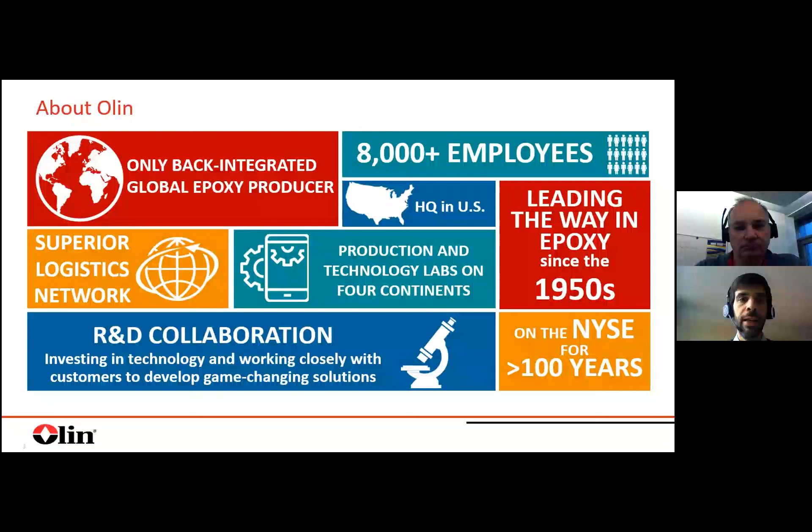Now, while I don't want to bore you with the full history of the company, let me just mention 3 milestones that I think are relevant for our discussion today. So, as I said, 1892 is the year the company was founded. Actually 2 companies were founded in 1892: Olin Industries, a manufacturer of ammunition, and Mathieson Chemical Corporation, the first company to make chlorine in the US out of the chlor-alkali process. So chlorine is really in the soul of this company since many, many years.

Then I skip some milestones. In the 50s, these 2 companies merged together, originating a group active in chemistry and ammunition. And Olin is still today that kind of company.

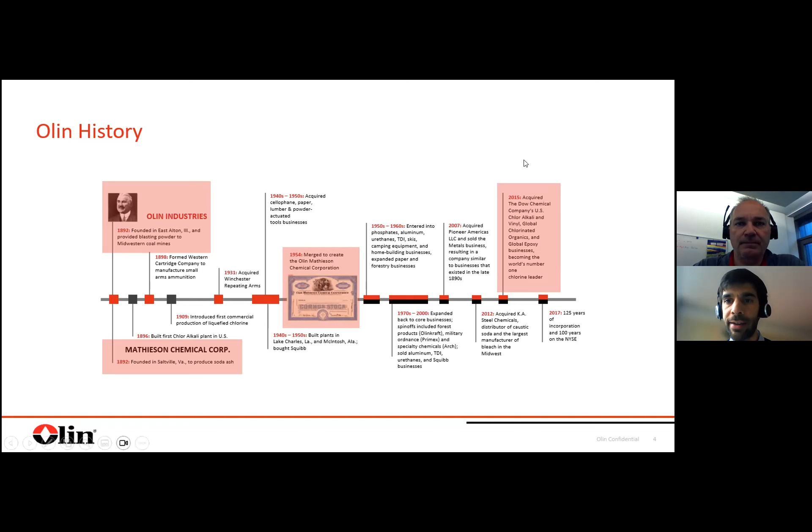And then I'm skipping to 2015, a very significant milestone for our discussion today. Olin acquired from the Dow Chemical Company the global epoxy business, the US chlor-alkali business, and the global chlorinated organics business. A transformative acquisition for Olin that, as we can see in the next slide, transformed Olin into the #1 global chlor-alkali producer, and importantly for our talk today, the #1 global supplier of epoxy materials, inheriting this position from the Dow Chemical Company and bringing it to the next level.

So today, Olin is divided into 3 businesses: Olin Chlor-Alkali Products and Vinyls, Olin Epoxy, the business Lars and I are part of, and Winchester, which is our ammunition business. So let's now focus on Olin Epoxy. What is Olin Epoxy doing? Well, in 10 seconds, we are leveraging epoxy properties like corrosion protection, lightweight strength, electrical insulation, and chemical resistance to approach those markets where these properties are valuable, like coatings, electronics, civil engineering, and importantly for our talk, composites.

Now, if you want to remember one thing about Olin Epoxy, I would really try to remember our model, right? Our deeply back-integrated model. But before going into that, I don't know how familiar each of you is with epoxy, but from a very high level, you could say to make epoxy you need 2 things: epichlorohydrin and bisphenol A. Now, most epoxy producers run a non-back-integrated model like the one you see here on this slide. So they source epichlorohydrin somewhere, bisphenol A somewhere else, and they make their epoxy resins.

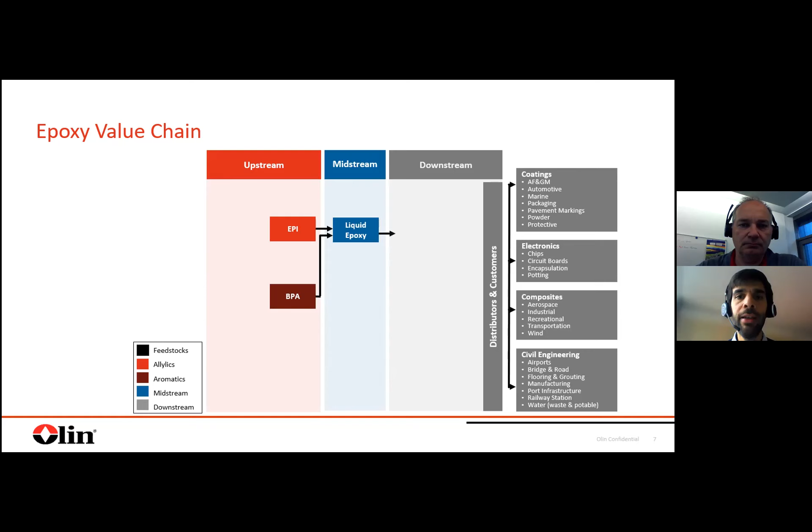Now, Olin's model is completely different, as we can see in the slide here. Olin is deeply back-integrated on those molecules that we think are strategic for our reliability of supply, for our scalability, for our sustainability. Look, for example, at epichlorohydrin.

We start from digging our own salt mines. We make with that salt chlorine out of electrolysis. From there, we make allyl chloride, we make our epichlorohydrin, and then our liquid epoxy resins, right? So a deeply back-integrated model that gives us the reliability of supply, scalability, and sustainability that we need to make our products.

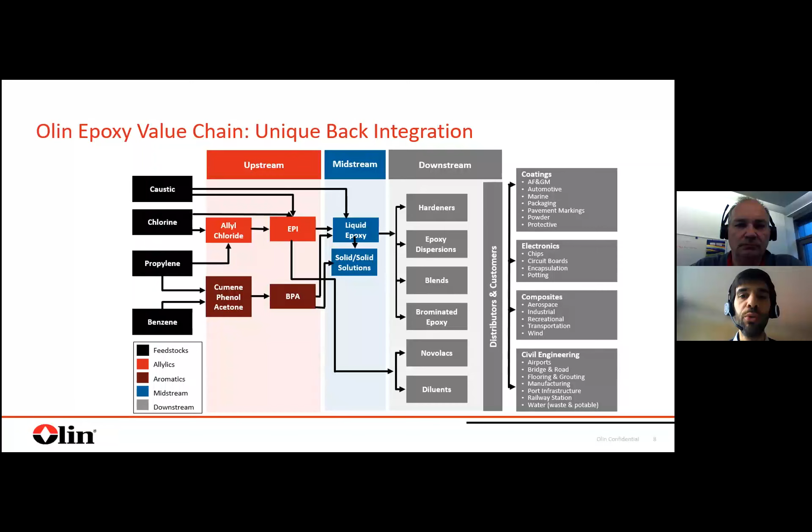This model is applied to a very wide portfolio of epoxy products. Some of these products are part of our composites portfolio, and that's where we come to our topic. In our composites portfolio, we have systems for pultrusion, filament winding, infusion, hand layup, HPRTM, and pre-preg. I think the composite portfolio is one where our deep back integration is very valuable.

If you look at these applications and technologies, they are linked to high growth applications. Pultrusion, as we will discuss today, goes into composite rebars but also wind energy applications. Filament winding goes into hydrogen mobility. HPRTM goes into e-mobility - high growth applications where we think our back integrated model is valuable to offer the supply reliability and scalability that these applications will need.

Now, in composites, what we see is that it's really not enough to sell a product. Process knowledge, process understanding is what we need to share with our customers to actually make them successful. And this is a bit what we're going to do today.

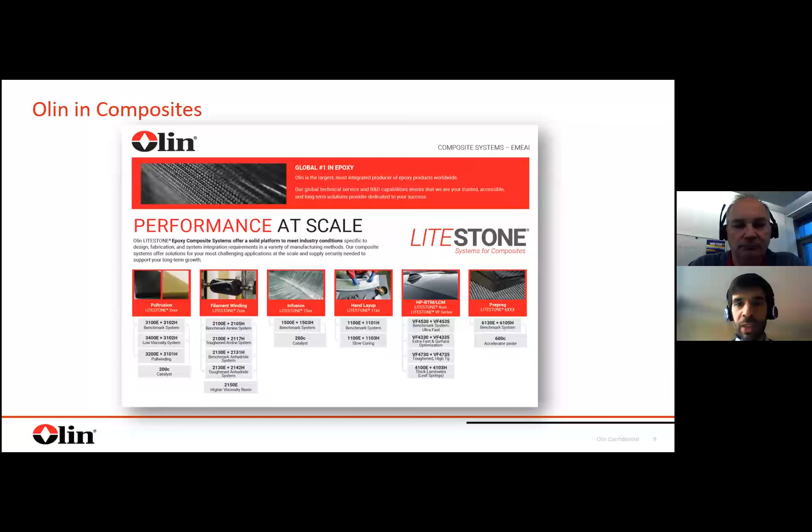So in the next slide, we are introducing the topic of today. We will speak about pultrusion and pullwinding processes, with focus clearly on pullwinding, explaining the specifics about pullwinding and why we think pullwinding is definitely not pultrusion. We will use as reference application for our review today composite rebar, which is made in pullwinding.

And we will demonstrate that, to make a quality composite rebar at high productivity, it's really not enough to just pick a standard pultrusion system. We need something specific, and we will talk about our LITESTONE epoxy systems for pullwinding of composite rebars.

But before going straight into the process review, let me answer one question: why epoxy? Why is Olin, the leading epoxy producer globally, talking today about rebars and pultrusion? Well, we think epoxy in rebar pullwinding has three main pillars in its value proposition: mechanical performance, high chemical resistance, and EH&S profile. Under the mechanical performance point of view, among the available composite matrices, epoxy is at the top end of mechanical performance.

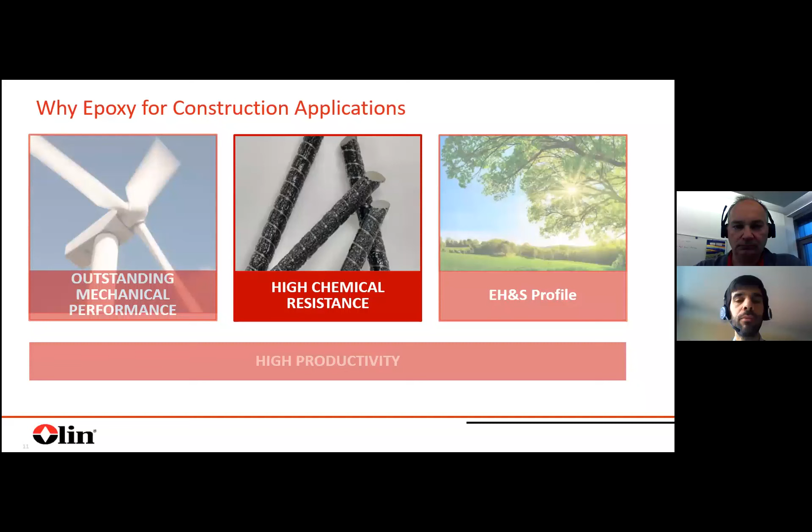But that's not all, because epoxy not only enables us to meet those specs, but it also enables us to retain those specs when the rebar is subject to attack from specific chemical agents. And that's what we are showing in the next two slides. I will not go into the details, but what we are showing is that we are not only matching the requirements of the specs, but we are also retaining those specs when the rebars are subject to the specific tests of these norms, like alkaline resistance tests and so on.

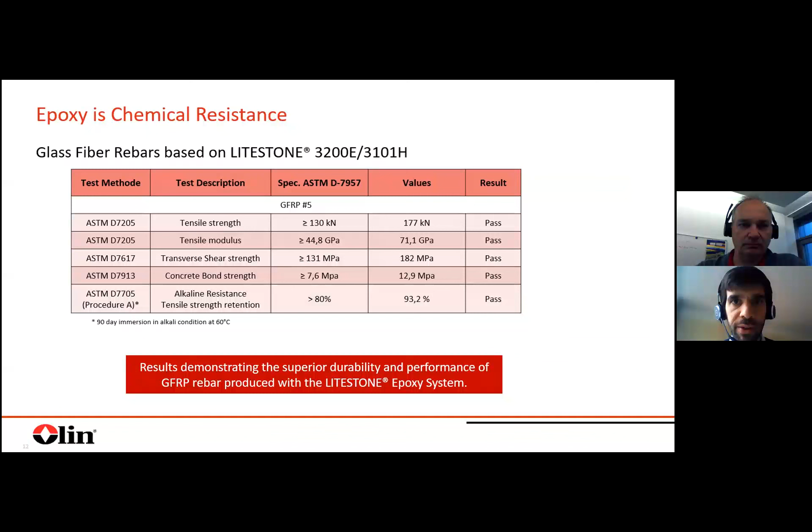And this does not only happen for glass fiber rebars, but it happens also with basalt fiber rebars. So chemical resistance is definitely an important pillar of the epoxy proposition in rebars.

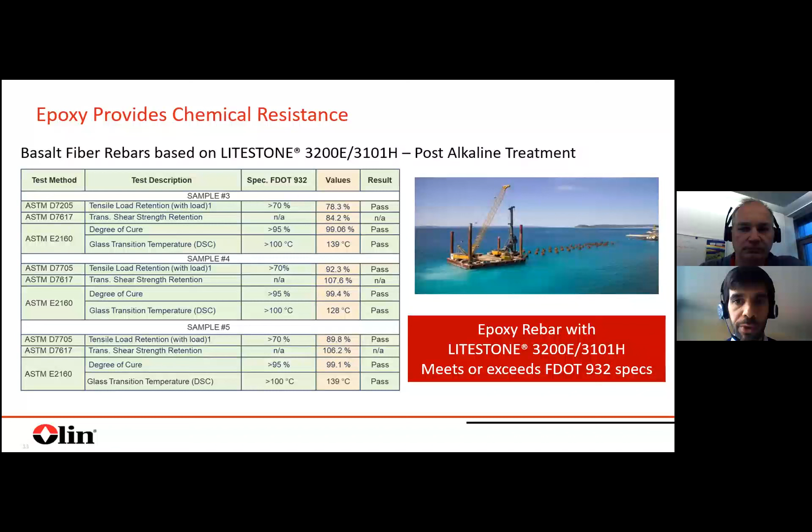And then last but not least, we come to sustainability. Epoxy is a fully solvent-free matrix, which means it's not flammable, which means it's friendly for the workers. And when it comes to installing or expanding production capacity, it means that this capacity increase happens at lower cost versus other matrices that use flammable solvents.

So with epoxy, you need simpler exhaust systems. You don't need an EX protected area. You don't need cold storage. So all that leads to a lower CapEx when installing or expanding capacity. So this was the answer to why epoxy for pullwinding rebar.

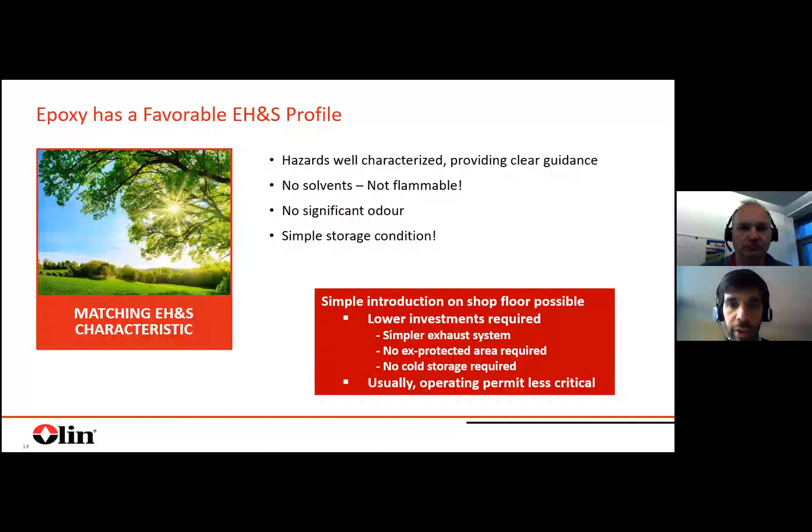And now it's really time to go deep into this process review, pultrusion versus pullwinding. And for that, let me turn it over to my colleague, Lars Friedrich.

Thanks, Martino. A short introduction also from my side - welcome. Lars Friedrich, T&D manager at Olin, based in Stade, and I'm the technical lead for all the high productivity processes like pultrusion, pullwinding, but also other topics as mentioned, HPRTM, LCM, and so on.

Really the essential part for us is to point out what are the differences between pultrusion and pullwinding, and what the effect on material selection really is. So first, I would start with the key message: what is really the main difference between pultrusion and pullwinding? At the end, it's really the cure scenario - how you cure your resin.

In pultrusion, where you have a well-defined shape, you have a closed mold where you gelate and cure the resin. This creates friction in the closed mold, which leads to higher pulling forces. There you have specific requirements on the resin, which is linked to this. I will come to this in a minute.

In pull winding, you have a completely different scenario. You just impregnate it, form it, and then you have a wet profile which is consolidated by winding, and then you pull it through a post-curing oven. So it's a freestanding cure, not in contact with any die doing the cure. So all the challenges related to pultrusion are not given.

That means that for these two processes, the requirements on the resins are really different. You can use both of them in the other process, but it will have a negative impact on productivity, quality, or whatever.

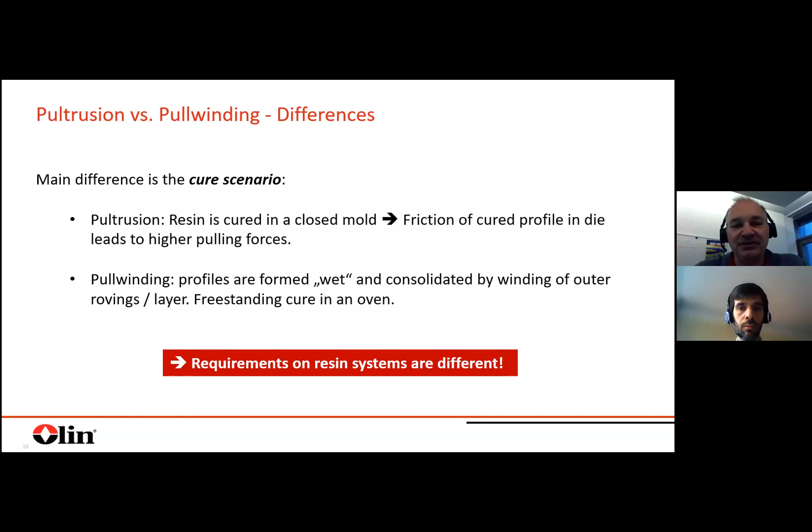Just as a scenario, I will not go too deep because I think pultrusion is well known. You pull your fiber through an impregnation unit, often a bath. You have a heated die where you cure it, and then you can wind it or cut the parts.

In pull winding, you have the same up to the impregnation bath. Then you have a kind of preforming unit where you just form your profile. Afterwards, you have a winding station to consolidate this profile, and you have a post-curing oven. So really, as described before, the cure scenarios are quite different.

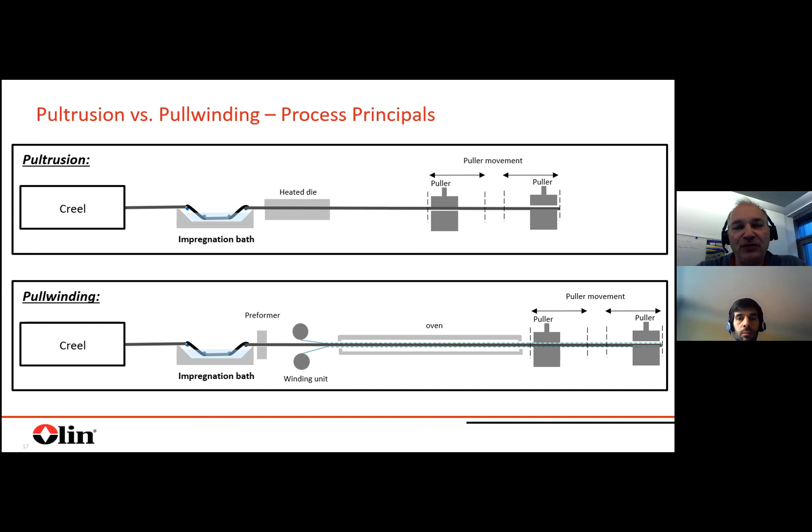So what does it mean for the resins themselves? If you compare pultrusion and pull winding on processability, for pultrusion I would say it's a more sensitive process, because you really have to find a good balance between processability, line speed, surface quality, and so on.

As you cure it in the die, you need a really accurate method to manage the pulling forces, which is also related to part quality or surface quality. In pull winding, as you have this freestanding cure, these issues related to the closed die don't exist. That means that from a processability point of view, pull winding is much more robust. It has a bigger process window, and it's not so sensitive to distortion and so on.

Internal release agent: in pultrusion, it's required. Otherwise, you will have a significant issue with your pulling forces and/or the surface quality. In pull winding, as you don't have a closed mold, it's not required.

The key requirement on process control for pultrusion, as mentioned, is that you have to find a good spot between positioning of the gelation point in the die to minimize the pulling forces and optimize the surface quality. On the other hand, you will also optimize your output, so at the end your line speed. So there you need a really well-defined way to do this.

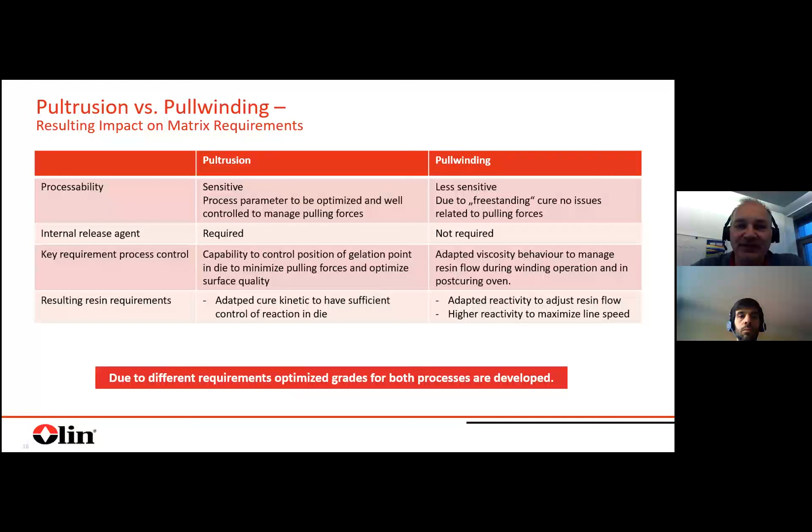But what I would like to do first is really go through the pull winding process and define the critical process steps from a resin point of view—what are really the steps in the process that limit line speed, what should be focused on to create a high quality rebar or profile. So the most important step is really the impregnation.

So key criteria here, for sure we have to ensure there is sufficient and good impregnation at targeted line speed. That means for high productive processes like rebar production, we're discussing 5, 10, maybe faster. So the requirements on impregnation are different compared to pultrusion, where we're discussing a range up to 1 meter per minute, maybe now going slightly higher, but it's a completely different range.

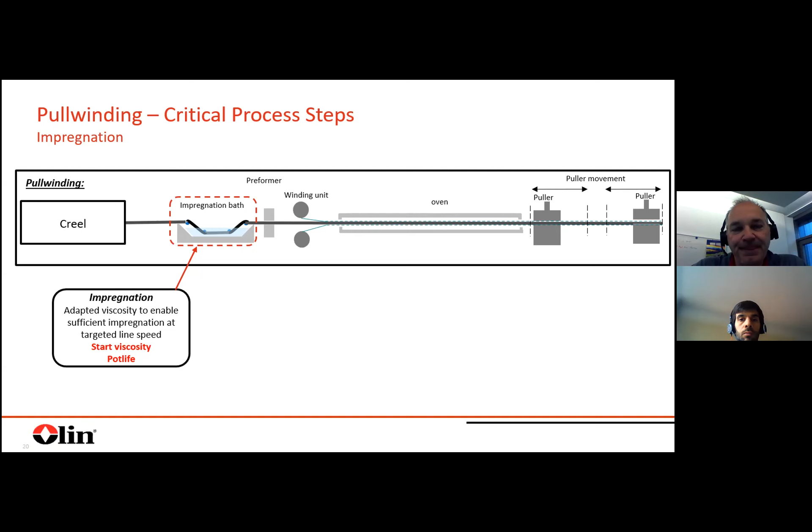Here the key criteria from a resin point of view is the start viscosity of the resin, and for sure the pot life if you're using an impregnation technology like an impregnation bath. What I'd also mention is that impregnation is also the limiting factor for the line speed of the production.

So mainly, I often say we need a high reactive system to run the line fast. It's not really a problem for us to create a high reactive resin system, so we can make it as fast as you want. The problem is really the processability.

In the typical setup of a Pullwinding line, it's an impregnation unit, a bath. That means you have pot life requirements, and this is really a limiting factor for the resin reactivity of epoxy systems. If you go to high line speeds, you need to make sure you have good impregnation, and there the resin is important—viscosity, wetting behavior, and so on.

But it's also about how you bring the resin to the fiber—simple baths, how your baths look. I will come to this in a minute. It's not only the resin which defines what kind of line speed can be achieved; it's really the combination with the impregnation.

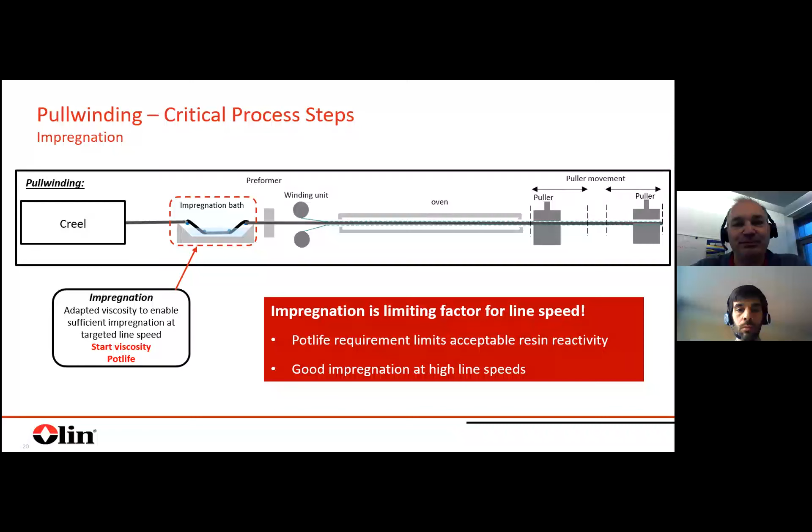This is something which can be optimized. We have a lot of ideas around this, I'll come to it later. But this should be kept in mind: when we discuss productivity, it's as usual the combination of material and process which has to be optimized. The key here for this process is really the impregnation unit.

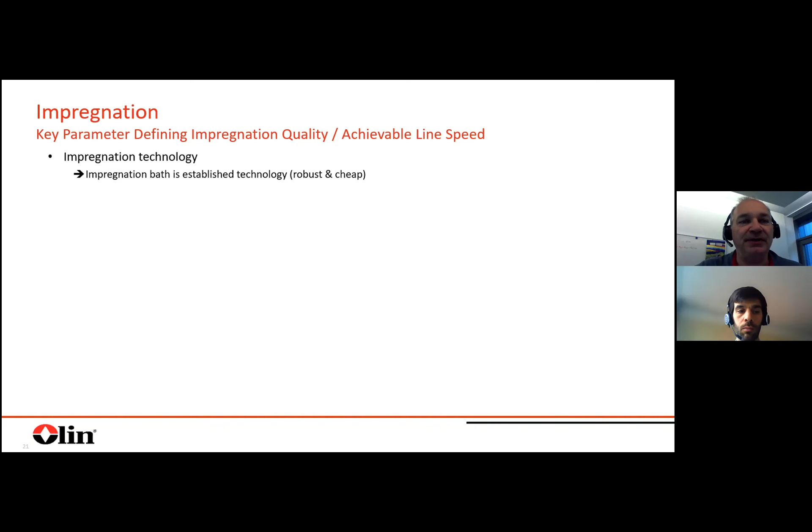So what are the critical parameters for impregnation? As mentioned, it's the impregnation technology itself—a simple bath, or for other processes, transfer rollers or whatever is used. It probably doesn't make sense for all applications, but the technology itself and the resulting limitations are really some of the critical parameters for impregnation.

Fiber type is also clear—if you try to impregnate a carbon fiber, it's a different story than glass, but also between different glass types. The sizing has a big impact, the quantity of the sizing directly impacts the impregnability, and this has to be considered when you design your process and your part.

For sure, the resin—no doubt. So the target for Pullwinding is viscosities below 1000 millipascal second at room temperature for bath impregnation.

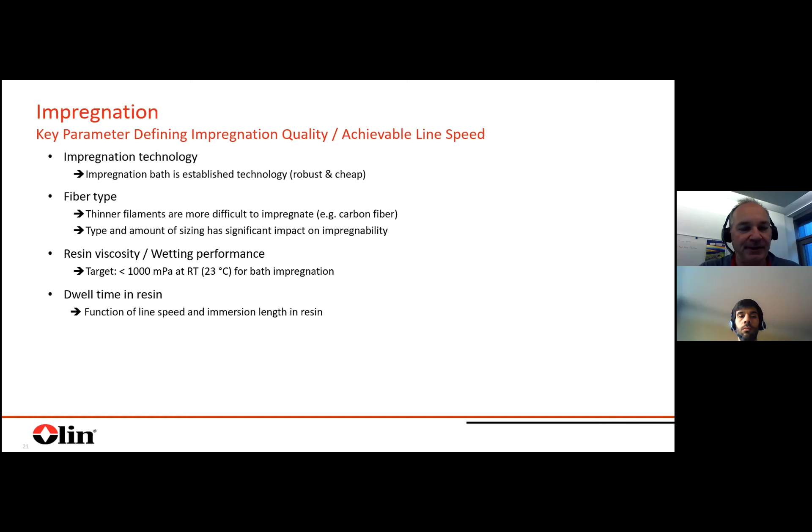The dwell time in the resin, which is a function of the line speed and the immersion length in the bath in this case—it's clear, if you have more time, then you have a better impregnation usually.

The fiber tension and guiding is often not considered. If you have, for example, high tension on the tow, it also closes the tow and makes impregnation more difficult. But also the fiber guiding of these tows has to be optimized so it has good access. If you bundle a few rovings and guide them through a bath, the inner rovings don't have access to the resin, so the wetting will be bad. A more homogeneous distribution could be helpful.

Spreading, for sure, is also important—to flatten it so there's better access. So everything related to fiber guiding and tensioning directly impacts impregnation capability.

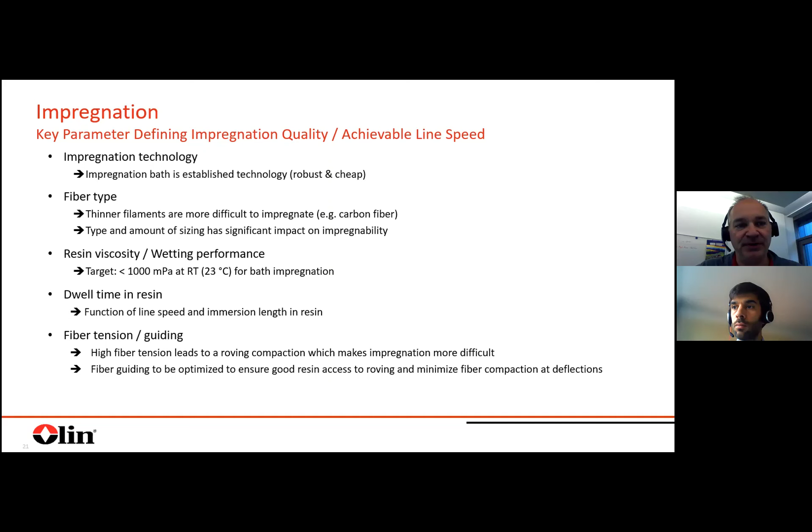Some recommendations in terms of optimization of the impregnation: for sure, as mentioned, it's really the design of the unit itself that has to be optimized. I think it depends on different parameters, how it can look, how sensitive your fiber is—some fibers break at every deflection, others are really robust. The pot life of the resin, is this an issue?

The viscosity, and for sure also pulling forces, which in Pullwinding is usually not a problem, but you can create pulling forces in the impregnation unit which, if too extreme, may lead to issues.

Fiber preheating is also recommended—first for softening, especially with glass, the sizing. It helps to open the glass rovings. Also, if the fiber is preheated, it doesn't freeze on a cold fiber. So when it goes into the fiber bundle, the wetting and impregnation is better. Otherwise, you have a local viscosity increase and you create a kind of micro porosity in these areas. So it's really helpful if the fiber is preheated.

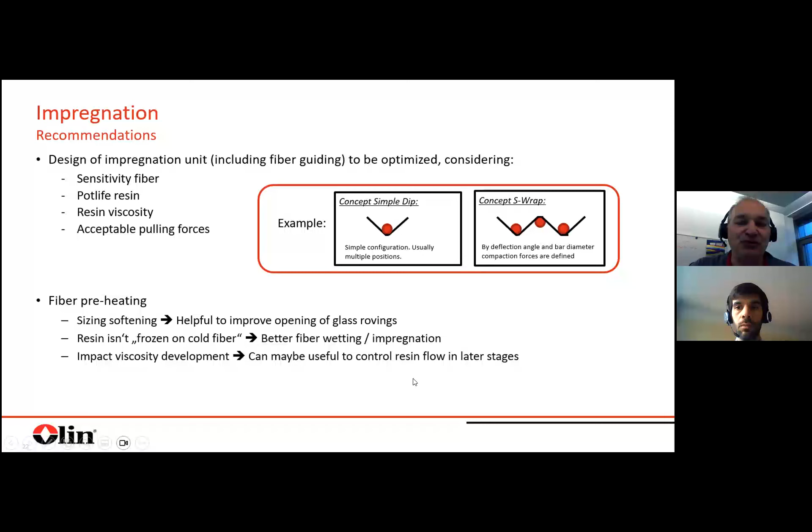If you have fiber preheating and then a bath behind, you also bring energy into your bath, which is usually not a problem, but if it's too extreme, it can have a significant impact on the pot life, depending on the setup and systems. This is something to consider, which for impregnation is normally manageable, and can also be helpful to control the resin flow in a later stage. I will come to this.

One other option would be to operate a heated impregnation bath. By this, you can reduce the resin viscosity, which simplifies the impregnation. You can also minimize the resin volumes in the bath or impregnation unit. This would really open the door to use more reactive resins, and then for sure you have also higher line speed potential.

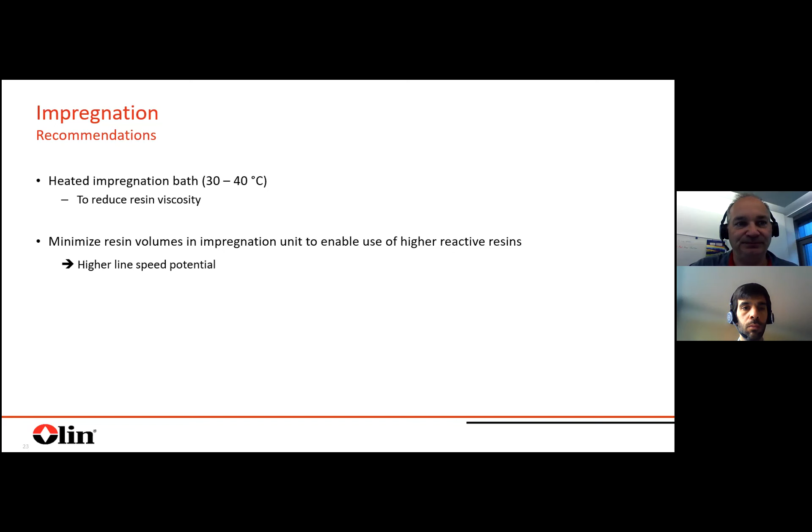As mentioned, key requirements from the impregnation point of view on the resin are a long pot life, which is a limitation for our reactivity, low start viscosity, and good wetting performance. So lower viscosity helps for sure. And it should be solvent free, from an EH&S point of view, to minimize emissions, as you often operate in an open bath.

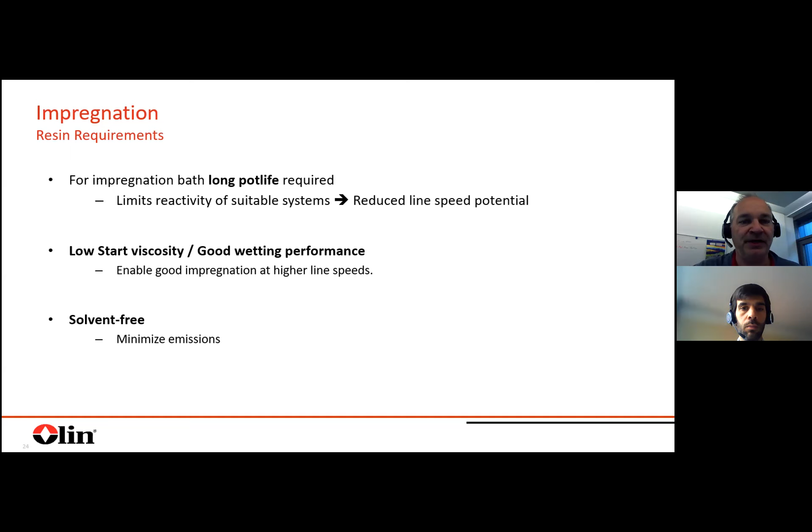So the next critical step would be really the winding unit and preforming. I think it's not the most critical step, but here often you need a kind of sufficient resin flow to impregnate the winded tows or plies. That means at this stage you need to understand and control the viscosity of the resin.

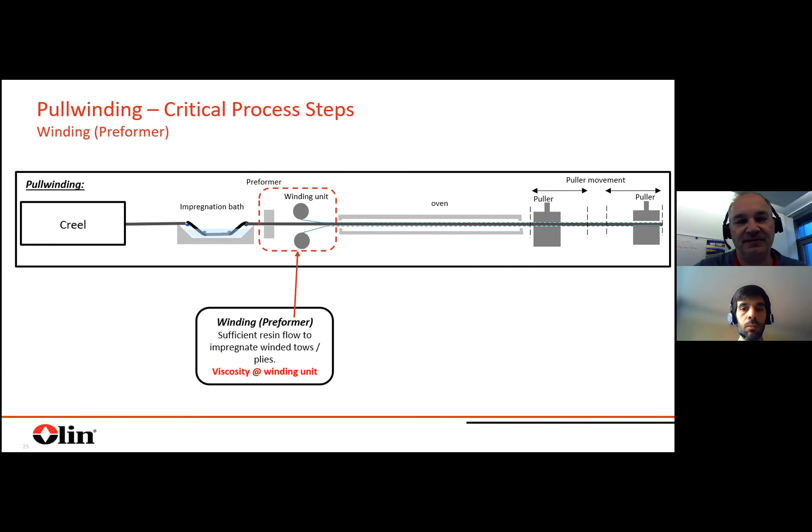The preforming unit's function is usually to bring the roving into the shape of the part, define the ratio between resin and fiber, and bring it to the winding station. So that means the design criteria for the preformer are the part design, and then you have to define what kind of excess resin is needed to impregnate later the winded tows or plies. But there's also a potential need to extend the functionality of the preformer.

If you have a bit more challenging fiber, which needs higher viscosity systems, you need to force the resin more into the fiber. That means you have to extend or integrate a kind of impregnation step - for example, just a few deflection bars on the way from the roving from the bath to the forming station, to further improve the impregnation in the tows. This really needs to be validated depending on fiber and resin.

And in this step, pulling forces are also created. You have to pull the fiber through something, and if you have these deflection bars, you have additional forces. So forces are created, but this can also not be negative - to some extent, pulling forces are also good to improve the performance of your profile.

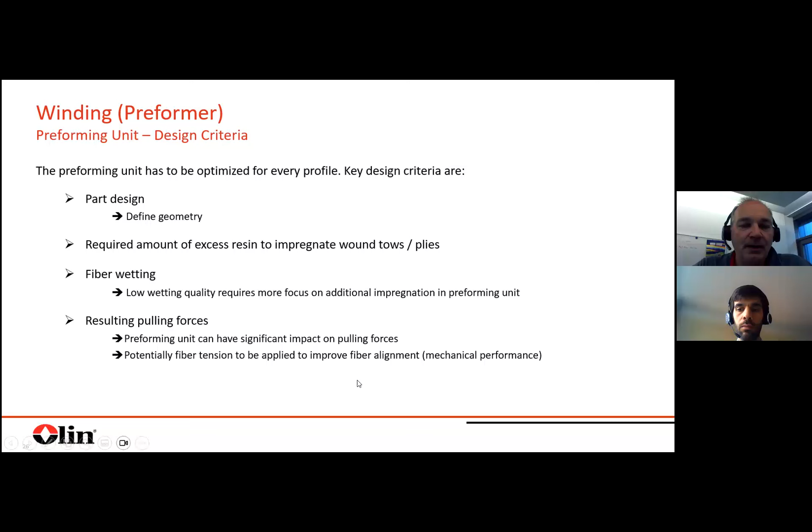So in terms of requirements, the critical part here is, if you wind it and the viscosity is too low, there's a risk that you squeeze it out, causing a deformation of your profile. That means the resin viscosity at the winding station is quite interesting.

It's a function of the start viscosity for sure, but also the thermal history. So that means, have you preheated the bath? Is there some infrared heater for the fiber spreading? Have you a heating system in front of the preforming unit? So it means, is there any temperature or energy which pre-aged the resin before the winding station? Often, in most cases, this is not too much of an effect, but it can also be used to overcome issues if this is recognized in the process development.

The resin flow is also defined by the amount of excess resin. So if you have more resin on your profile and you apply force on it, it's squeezed out, especially if the viscosity is too low. The winding tension also has to be optimized to ensure good consolidation of your part, but on the other hand, don't squeeze out the resin and deform the directed fibers.

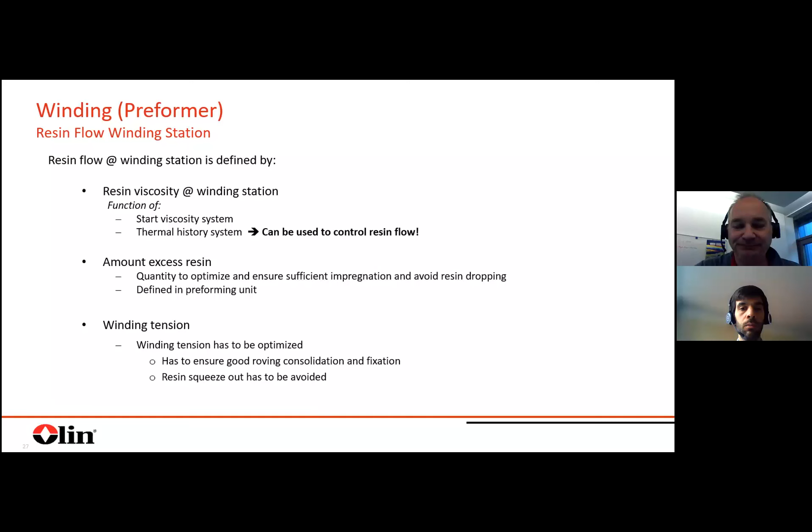So the next critical part is the oven entry. Here you need to control the resin flow to avoid resin dripping. This is, I would say, the most critical question I see, and it's really related to the viscosity at the oven entry and the reactivity, because there you start the gelation and reaction, and the viscosity builds up.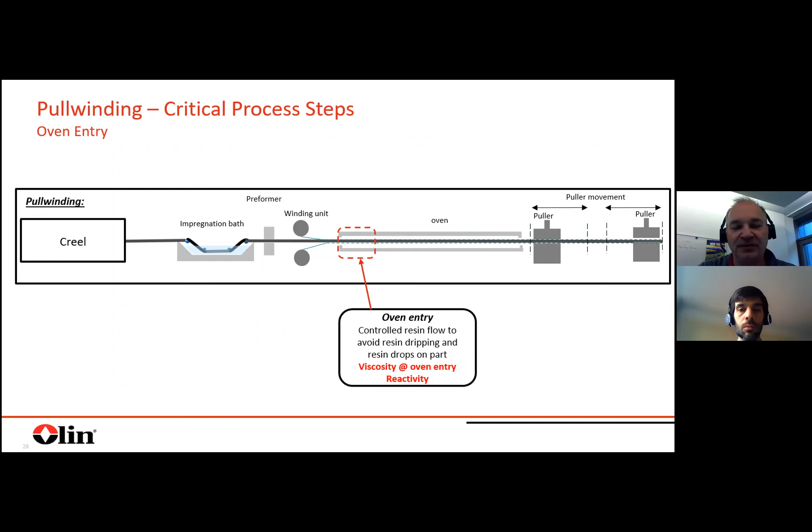So what it means is, everything before the oven, you may have some temperature which has an impact on the viscosity of your resin, kind of aging. But often it's a quite simple setup, just pulling it through, no real aging.

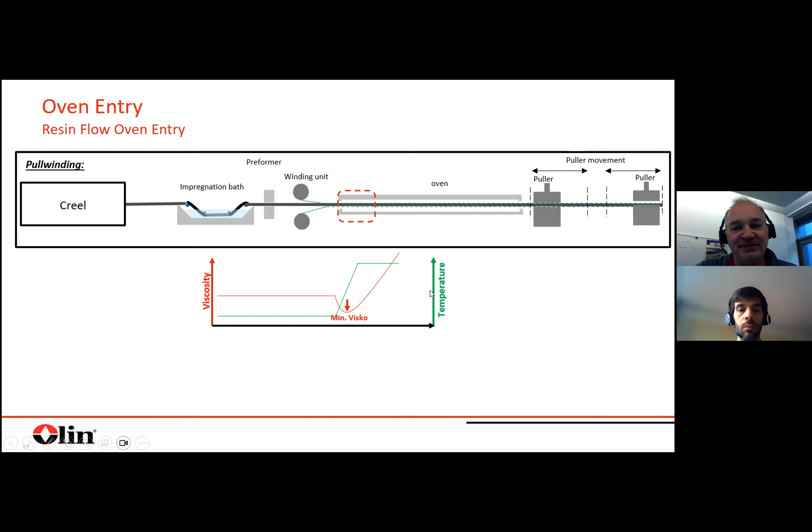But if you then go to the oven, here you have, for example, a viscosity of 600 millipascal second, but then you heat up the profile and the resin, so the viscosity drops to some extent. Then the reaction kicks in and viscosity builds up. But you've created a viscosity minimum at the oven entry, and the effect of this is you often create resin drops on your profile.

In the worst case, this resin flows into your oven and contaminates it. So it's really a typical challenge in the process which has to be managed.

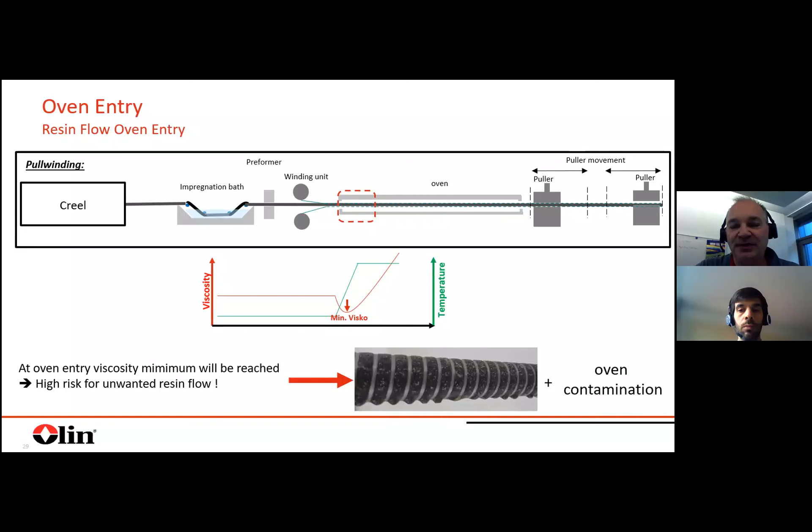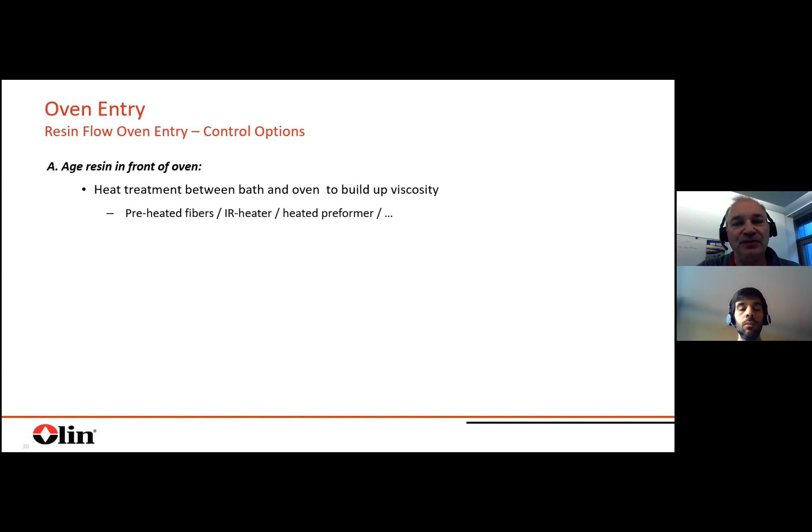So there are two options from our point of view, from a resin point of view. As mentioned, the first would be to age the resin in front of the oven by some heat treatment on the way, just to build up some viscosity so that the minimum viscosity will not be too low.

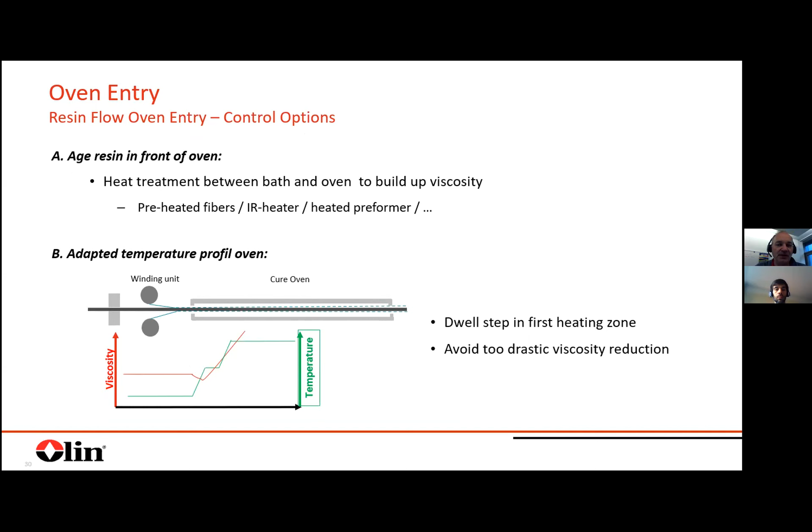Or you have a specific cure profile in your oven, so that the first zone is not at whatever, say 200°C, but you maybe start with 120 or 140, just so the viscosity doesn't go down too much, and then the viscosity builds up. This is a way to minimize this effect or avoid it completely. This step also has to be looked at depending on line speed and so on, but it's something which is quite effective to overcome this.

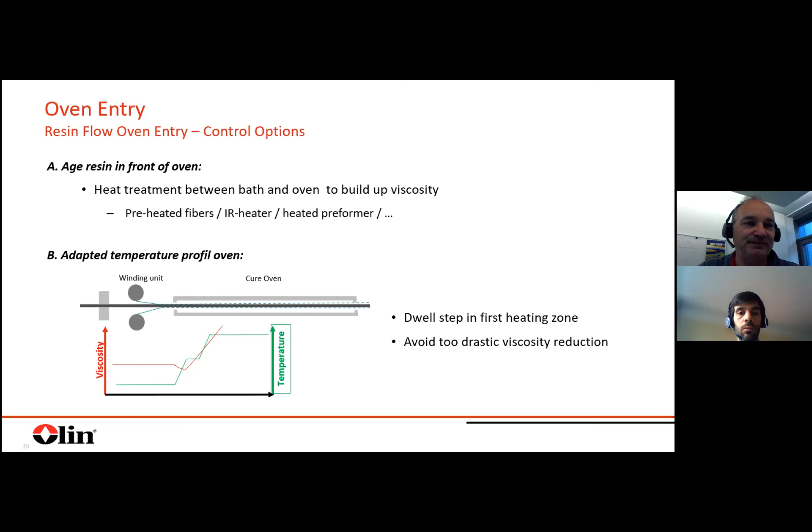So the last critical step is the cure itself. From a process robustness or quality point of view, it's really the cure speed and the degree of cure - how well cured is your part. This is really the criteria here.

And this is related to the reactivity of your system. This is also, I would say, the reason why impregnation is a limiting factor. At the front, you need less reactivity to ensure a good and long pot life. At the end of your line, you'd like to have high reactivity to speed up or shorten your oven, whatever is your preference. But there's a bit of a fight between these two requirements.

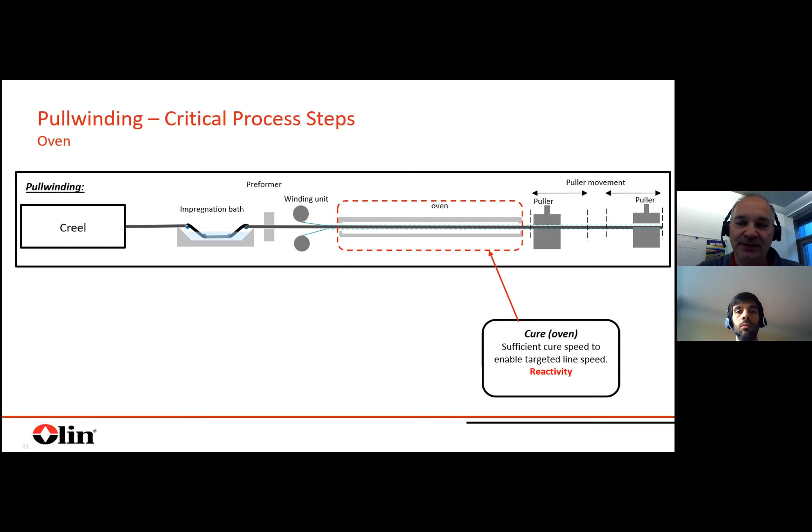As mentioned, it's a freestanding gelation and cure in the oven, so regarding friction and interaction with a die, it's not a problem. It's really a function of how you achieve the degree of cure at the oven exit, and this degree of cure is a function of the thermal history of the resin.

Mainly this is in the oven, but also everything in front of it - the temperature profile in the oven. It should be considered that the temperature settings of a post-curing oven are not the temperatures which are effective on the part, but I think everybody who operates this kind of equipment is aware of this. I think it's quite important to understand what the actual temperatures are on the part and how this correlates to the set points.

The line speed defines the time in the oven, as mentioned, along with system reactivity. Higher reactive systems, for sure, have higher line speed potential.

And critical also is the dimension, especially in rebar, if you go to thick ones with glass. You have the feature of glass fiber that the heat conductivity of glass is not so good, so it takes some time to heat the center of your profile. This is something hard to overcome, so you need more time, which slows down the process. This is something really to consider.

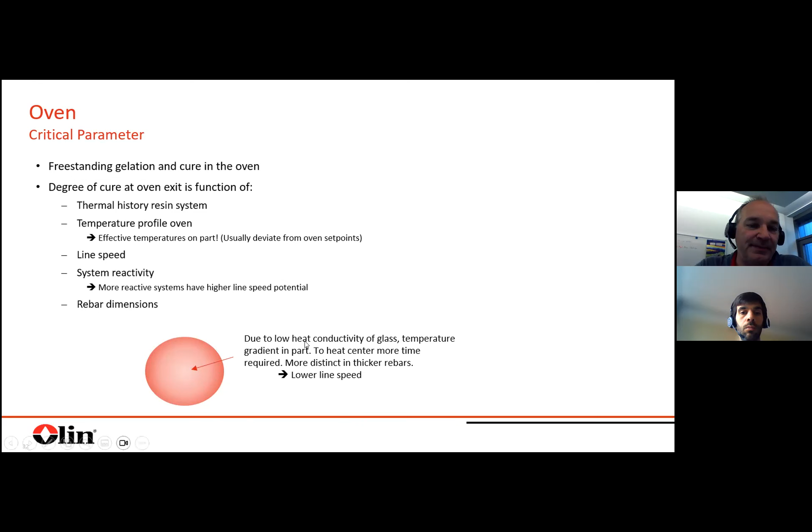So what could be helpful to increase your productivity? For sure, it's a function of the selected resin system. That means how the impregnation looks, how fast you can run the system with good impregnation, what is the reactivity, the impregnation unit to enable the impregnation, and the thermal history of the resin in the production line.

So to maximize this, the first important point is really to optimize your impregnation unit. In the best case, to enable the use of more reactive resin systems. For example, in a simple way, create a bath where you don't require the pot life of several hours. Maybe one hour is sufficient. Then you can accelerate the system much more.

Also a way to improve the impregnation at high line speeds is by changing the tensioning or guiding of fibers. Fiber preheating is quite efficient in terms of impregnation, pre-aging the system before the oven. As mentioned, it's helpful to control the resin flow at the oven entry, which means if this isn't required, you don't need to put high effort into avoiding resin dropping. You can be more aggressive with the temperature profile right from the beginning in the oven, so you can run faster. And for sure, the simplest option would be just to extend your oven length.

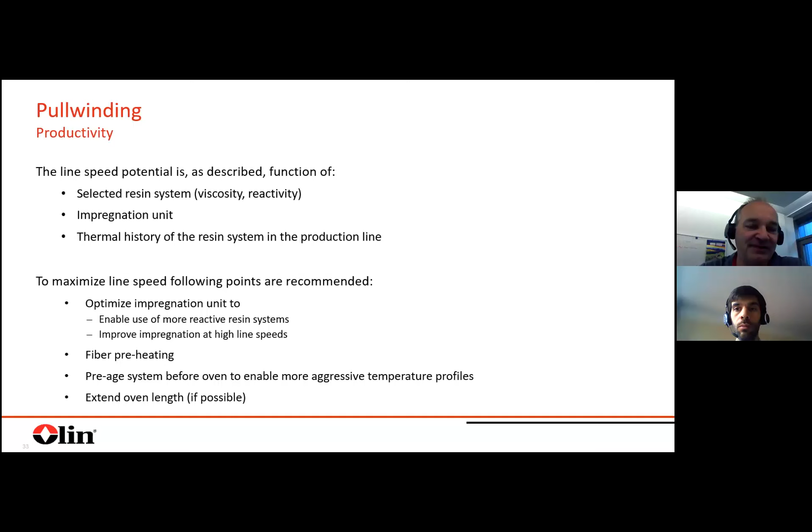I will not bore you too much with our portfolio, only two slides. First, as mentioned, we have two grades, or groups of products. First for pull winding, where we're really targeting line speeds above 5 meters per minute, with good impregnation at high line speed and higher reactivity. So the characteristic here is more on the lower viscosity side, and it should be more reactive.

For pultrusion, we're really targeting line speeds below 1 meter per minute, with good impregnation at this line speed. Here we have a little bit more freedom; the key is more about high process robustness. As mentioned, the pultrusion system is more sensitive due to the fact that it's cured in the closed die. Here we put a lot of effort in - I won't explain fully, but this makes a big difference compared to pull winding. That means we have a resin characteristic with an adapted cure kinetic to enable control, and an improved sliding behavior in a closed mold.

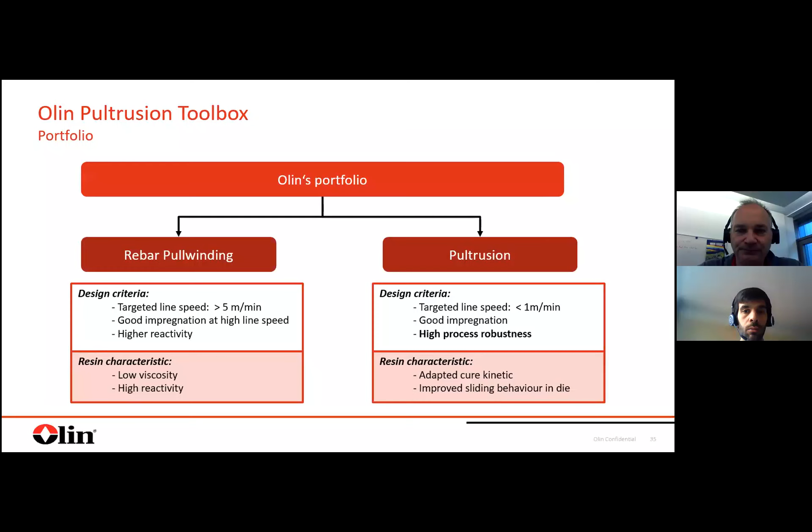At the end, we have a portfolio - I won't go into detail, but I'll point out two things. First, if you compare, we have two standard grades: one for pull winding, hardener 3101H, and for pultrusion, the 3102H. If you compare the two systems, you see a significant difference in viscosity. Pultrusion is higher, and as mentioned, since we're not targeting high line speeds there, we can accept that the viscosity is higher - the impregnation will still be achievable at this line speed. In pull winding, we reduce it just to open up the line speed potential, and it's also slightly more reactive, though that's not visible here.

Both systems can also be further accelerated. So if you have a process where you can handle shorter pot life, we have the option to further accelerate the system and increase productivity. If any questions come up on this, just let me know. But at the end, we'd highly recommend looking at your requirements and then selecting the adapted system for that. For sure, you can use pultrusion systems in pull winding too - it will work, no problem. But if you're looking to maximize your output and productivity with an adapted system, you are on the better side.

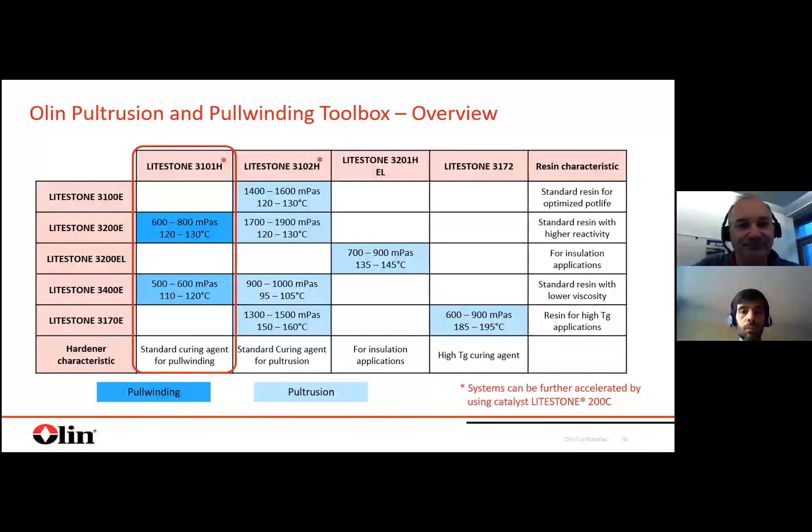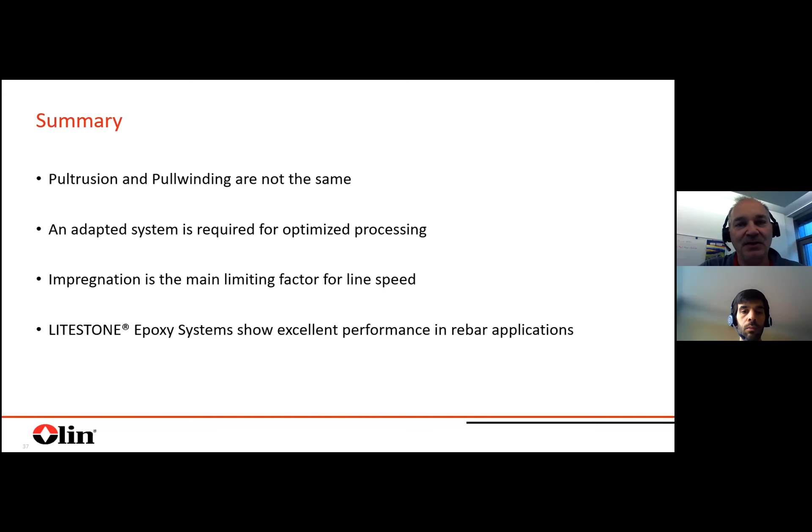So my summary: first, pultrusion and pull winding are not the same. As I tried to explain the reasons for this, to optimize for your process and productivity, you should carefully look at an adapted system and maybe also find a good way to adapt and coordinate the resin characteristics in your process setting. From my point of view, the impregnation is also the main limiting factor, as explained, due to the impregnation itself and the requirement on pot life. And we have systems in our LITESTONE portfolio which show excellent performance, also qualified against different standards, especially in the rebar specifications.

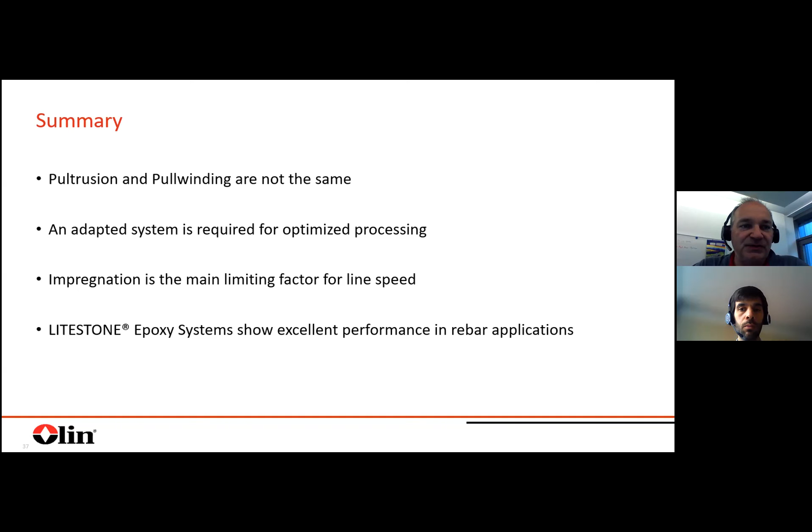Yeah, so this is really my part. Thank you for your attention. If any questions come up, I'm the technical contact, so just feel free to get in touch with me. And then I would say, Bastian, up for questions?